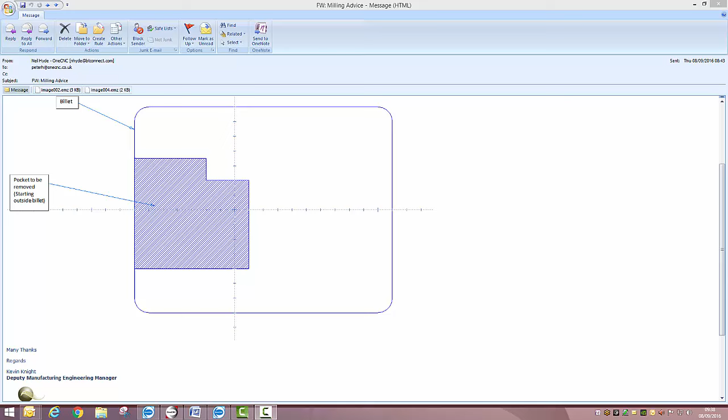Neil's asked me to give you a bell and just to explain or to go through how we machine an open pocket. Well, he's given me this file. There are no dimensions on it, so I've just drawn something up that represents what we're trying to look at. Okay, well, I've done all this on separate layers just so you can see exactly what's going on.

First of all, your main profile is your billet profile along with the cutout that you want to put in the job. On the second layer, which I've called pocket boundary, that basically just has to cover the boundary or the open section of the pocket.

However, you will notice on the front face, I have offset the line from the front face by approximately 0.1 of a millimeter. That is purely because you can't have two lines sat on each other to create boundaries. So just extend the front edge by a minimal amount of, say, 0.1 millimeters.

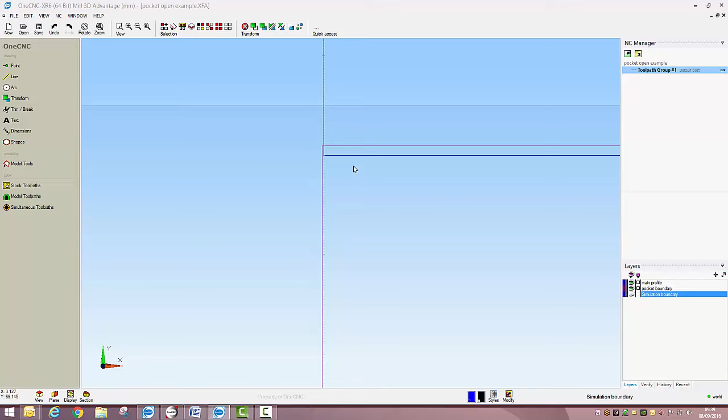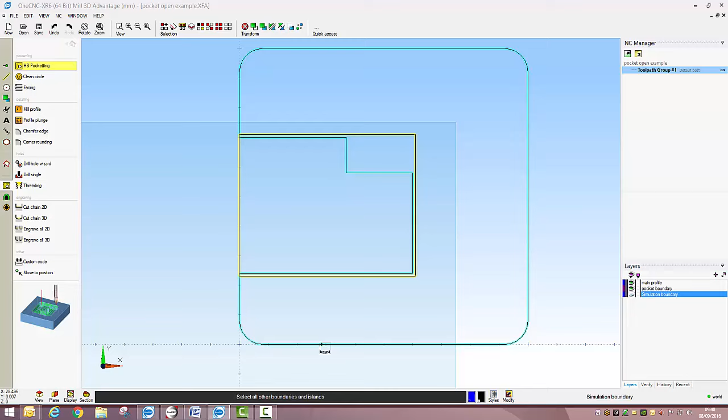Once you've got your boundaries set up, you're simply going to stock toolpaths, select high-speed pocketing, and where it says select the first closed or open boundary at the bottom, you select the boundary covering your open pocket. The prompt will then change. Select all other boundaries and islands, which is your main body profile, and you just simply left click and then you right click to end the command.

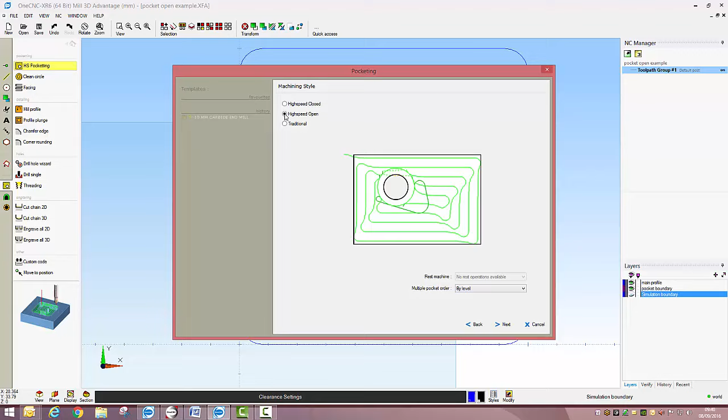We can then select the tool of our choice, speeds and feeds, usual, rapid plane, plunge clearance, material top, and obviously the depth that you want that pocket to be in, and select next. You then select your high speed open command.

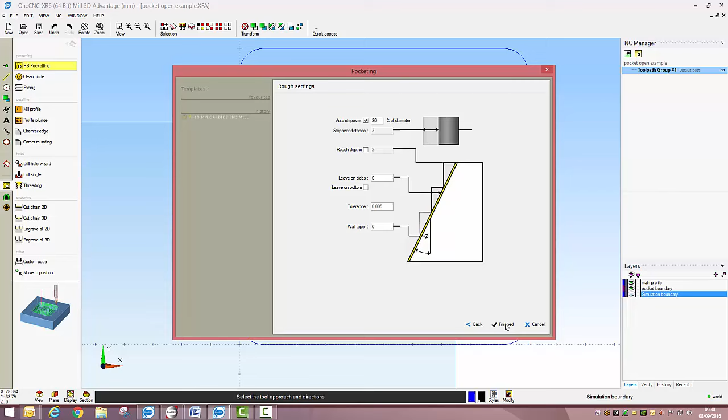Because we're starting outside of the material, we can plunge, step over, obviously depending on the material, the tooling, and the depth that you're going to be working with. I'm not really too worried about leaving stock on the sides or on the bottom. And there you have an open boundary cut. Tool obviously starting outside the profile, working its way onto the inside.

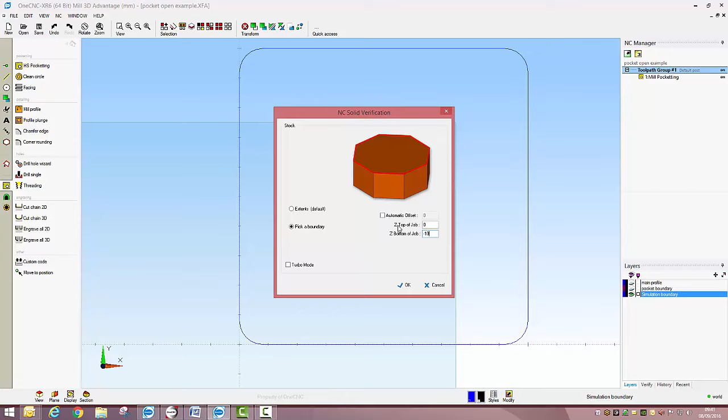Now, just for simulation purposes, I have created a simulation boundary, which is exactly the same size as your main profile. So we can right click on the toolpath group, simulate rest, picking a boundary, top of the job and bottom of the job, and select OK. Then we just simply select the boundary and right click to finish.

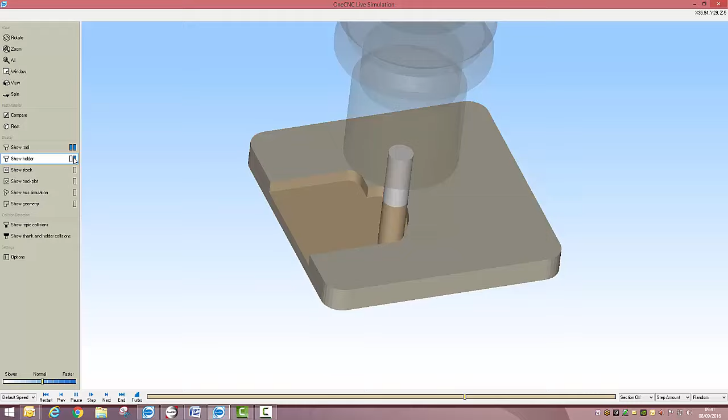And as you can see, the tool starts outside the boundary and works its way in towards the pocket profile. And that's it.